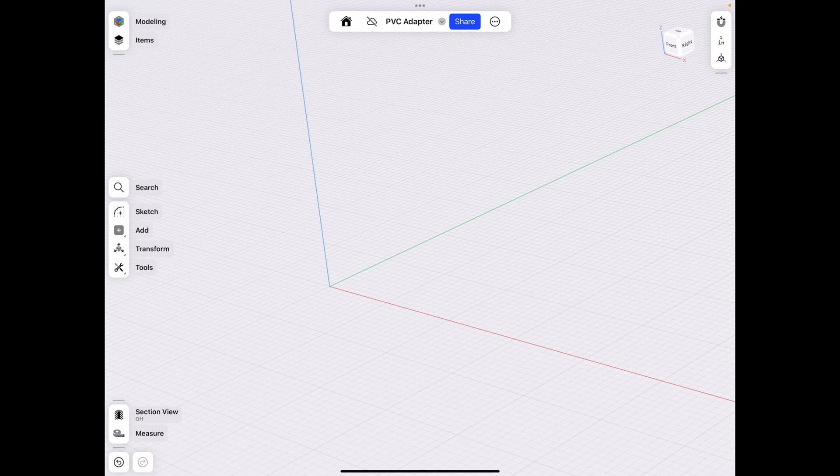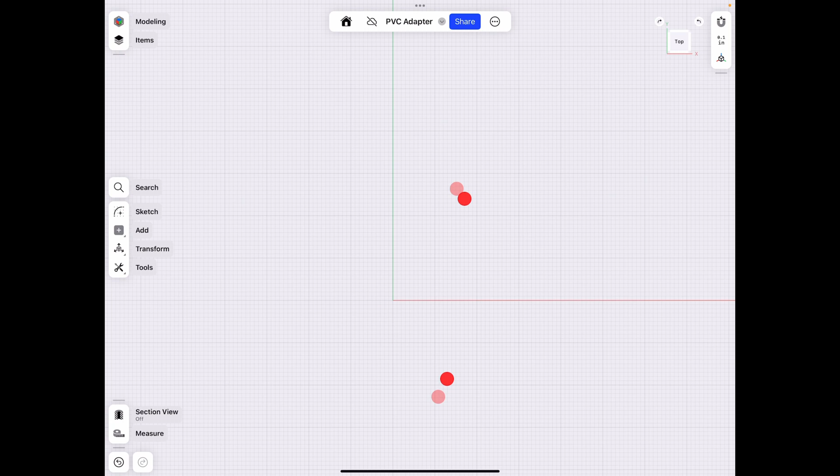Today we're going to be working on a PVC pipe adapter. We'll start off by making a sketch at the top plane. To get to the top plane, make sure you press that top button right there on the right.

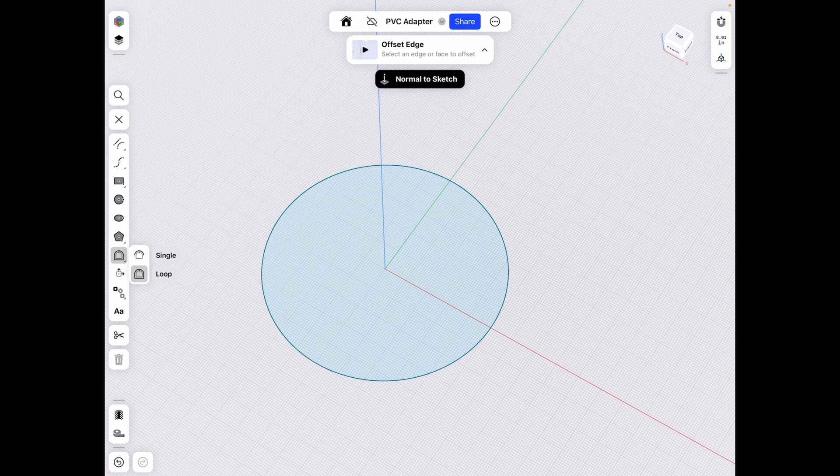We're going to start out by making a circle. Most pipes that you're going to come across are around 1 inch. They're not exactly 1 inch, so keep that in mind as we're working on it, but just for reference on this project, we're going to make it 1 inch to make it easier to count. Instead of extruding it and shelling it, we're just going to offset it as a single, 0.1 inches.

Then we go ahead and select the outer circle and extrude it, let's say 5 inches. Then let's go to the top plane and double click that and make our 2-inch diameter pipe as well.

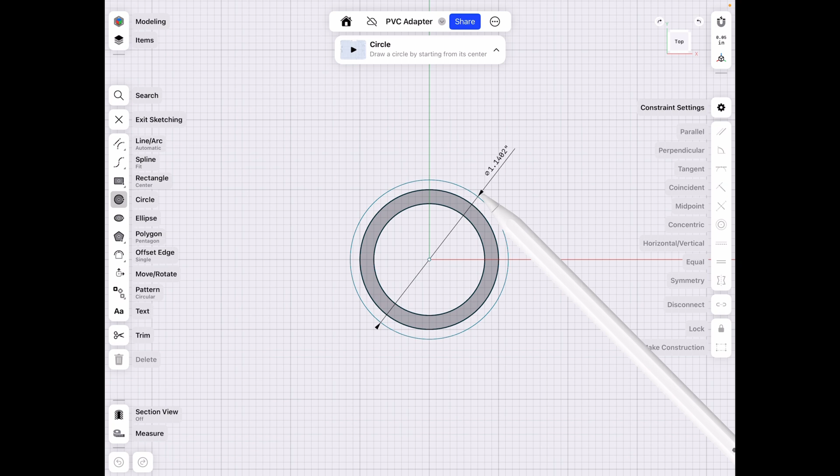Let's go ahead with the circle from the center, make it 2 inches, and then offset that as well, this time by 0.2 inches. And let's extrude that by another 5 inches to have a total of 10.

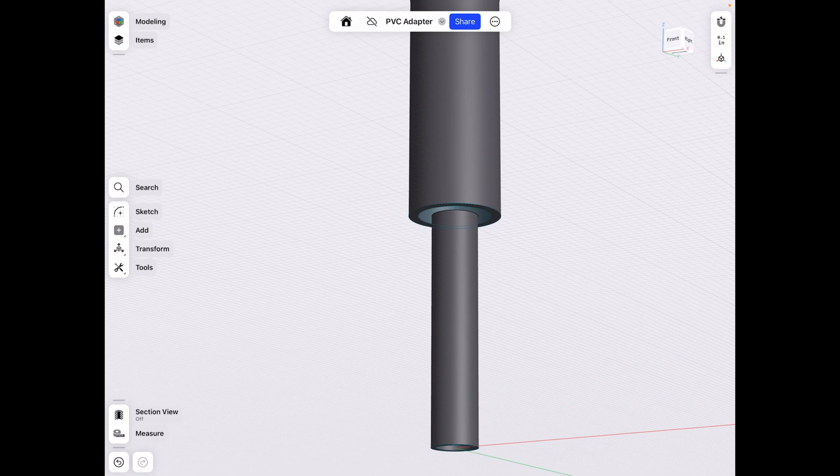Now that we have this, we can see that we need a transition to go from the 2 inch to the 1 inch. So we go to the front plane again, and instead of doing the extrusion way and then making it out of 3D shapes, we're going to actually start off using sketches.

Let's go to section view. Let's zoom in on our object and make a random sketch here so that those dots appear that help us with the sketches. We're going to go ahead and start by sketching outside of the shapes to make a frame of sorts. Let's go ahead and delete that extra one.

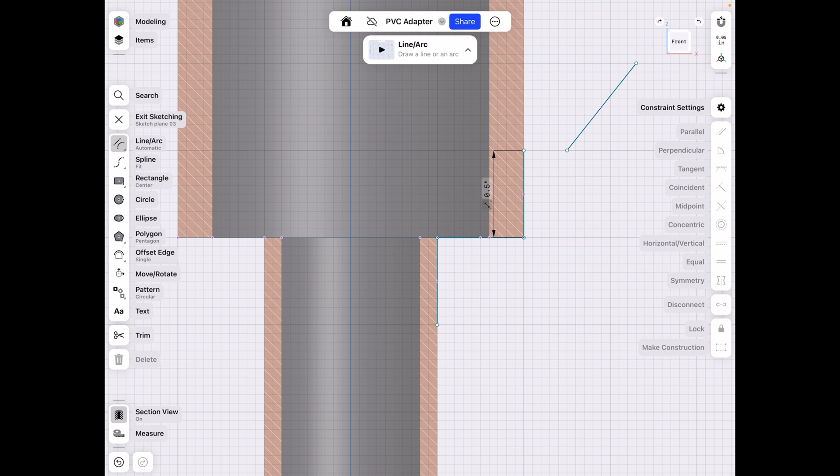It's no longer necessary. We're going to go ahead and sketch this instead of offsetting it, just because we can save some time since we're here on the grid. But if you're off the grid at some point, you can always just offset it to get that exact number.

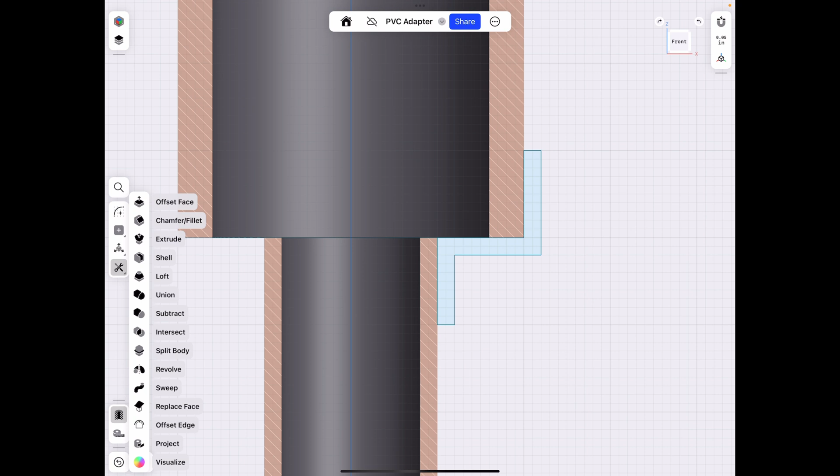So now that we have that, we can exit sketch mode and go to Tools, Revolve. We select our closed sketch, and use the center Z-axis to make a revolution.

If you're off the center, you can always just sketch a line down in the center between your objects, and you can use that line as a revolution. Click Done. Now if we turn off section view, we can see that we have a basic adapter.

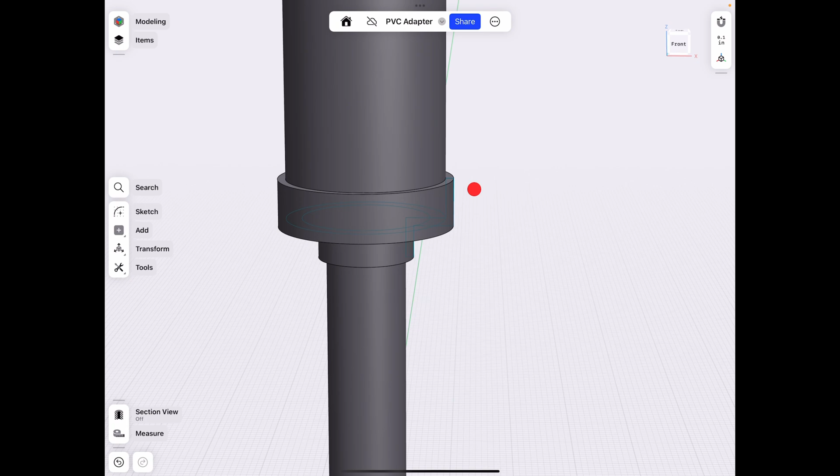Let's go back to the front view and continue on, because as you can see here, while we do have an adapter, we now need a stopper here, because if we just put in our pipe and there's no stopper, it's going to keep going as much as it wants.

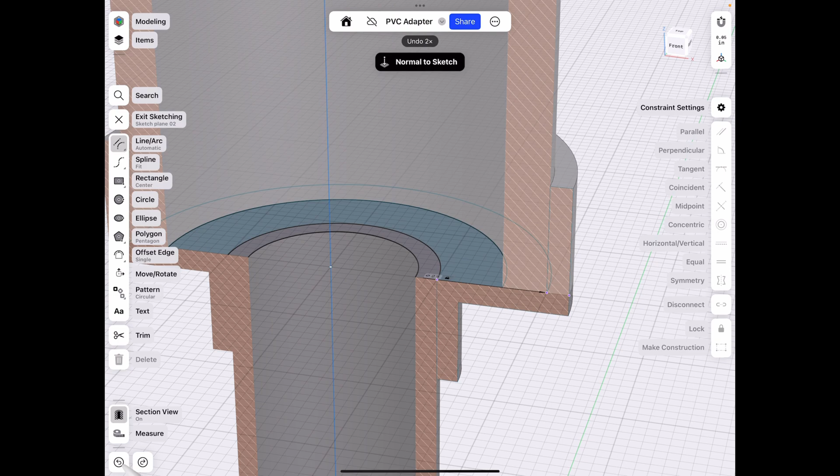So we need to actually extrude that little piece there so that we have a spot that stops the going forward. Let's go ahead and go to Tools and Extrude.

We want to extrude this as a new body, that way it doesn't connect any of the pieces. So make sure you select those two faces, then pull it up, in this case by 0.1 inch, as a new body. Then don't forget to move up your 2-inch pipe by 0.1 as well.

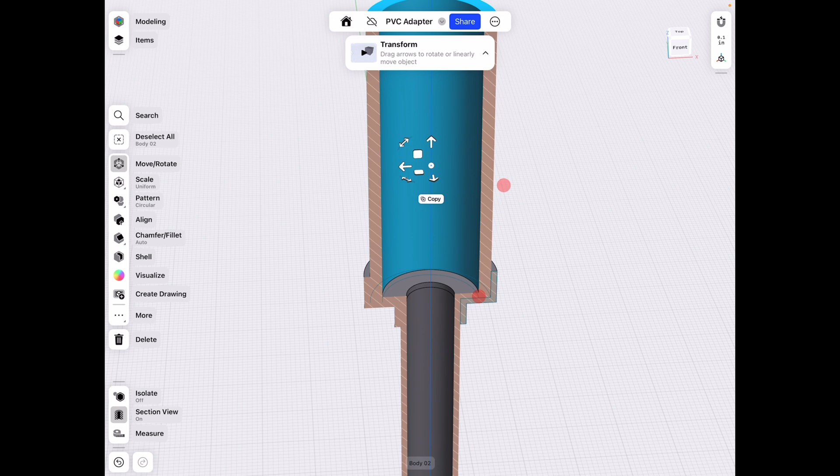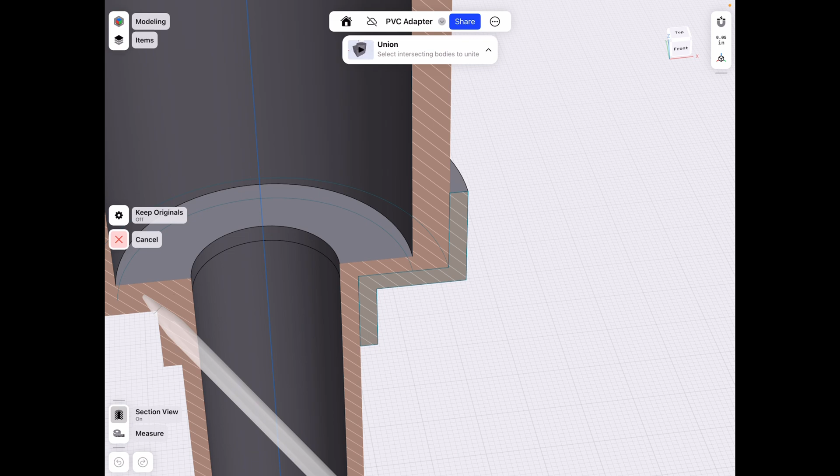Once that's done, we go to Tools. Actually, because I didn't pull this up first, we have to expand it. So let's go Tools, Replace Face, this one with this one, click Done, and then go to Tools and Union. If you would have pulled up the 2-inch first and then did the extrusion, it would have done it the correct way, but let's just continue on and make this, since it works either way.

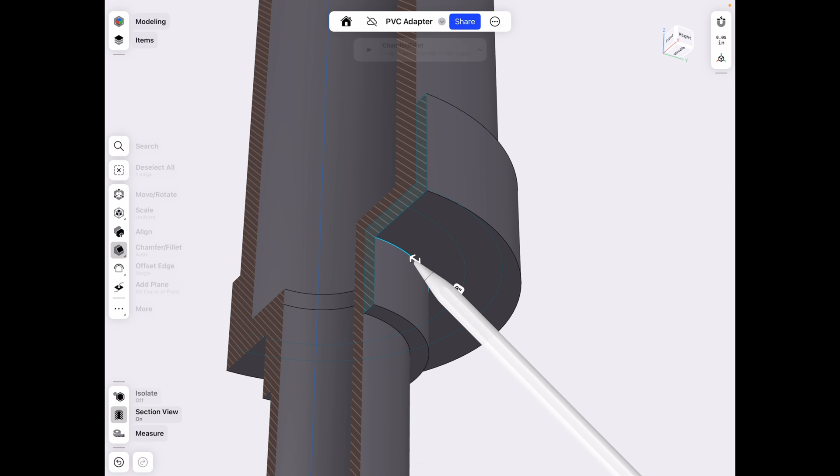And once we have this, we can basically be confident that our pipe transition is pretty accurate, and we can go and finish up making a fillet here. And if you want to find out the exact length of your fillet, you can either click on that line there, which is 0.5, or click on both of these, and you can look down here and it shows you the Z height. Okay, so that's going to be 0.4 Z height. So if you go over here and do a negative 0.4, that's going to be a chamfer of 0.4 inches.

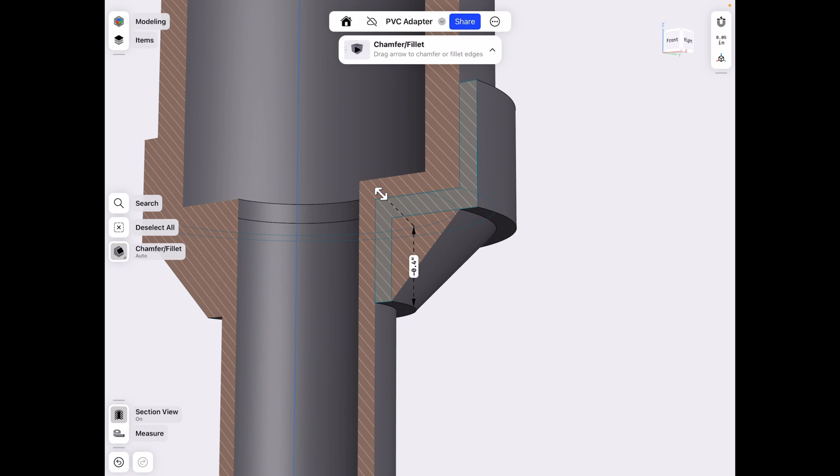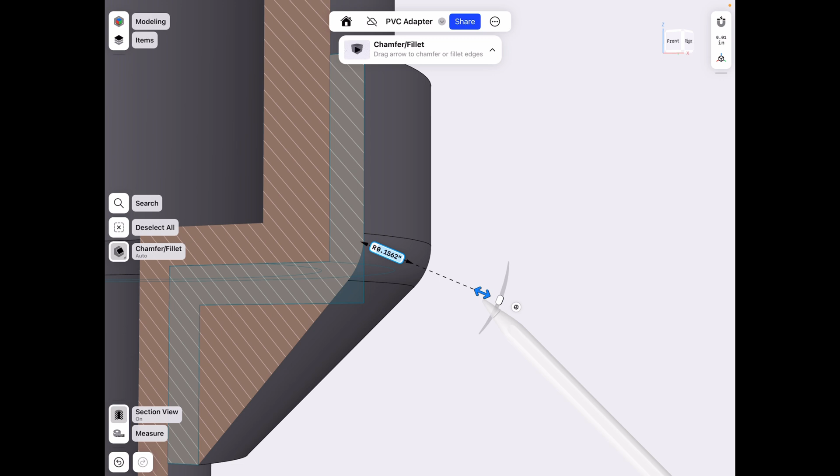And if you want to continue that chamfer, you can just go here. I'm pretty confident that's in 0.1, so let's type in 0.1. And then you're going to have this extra edge here, which if you don't need it, you can always delete it. So that makes our job a little bit easier. All right, and then you can fillet it as necessary. Let's say 0.25 for an example. And we basically have a neat looking adapter that's really 3D printable.

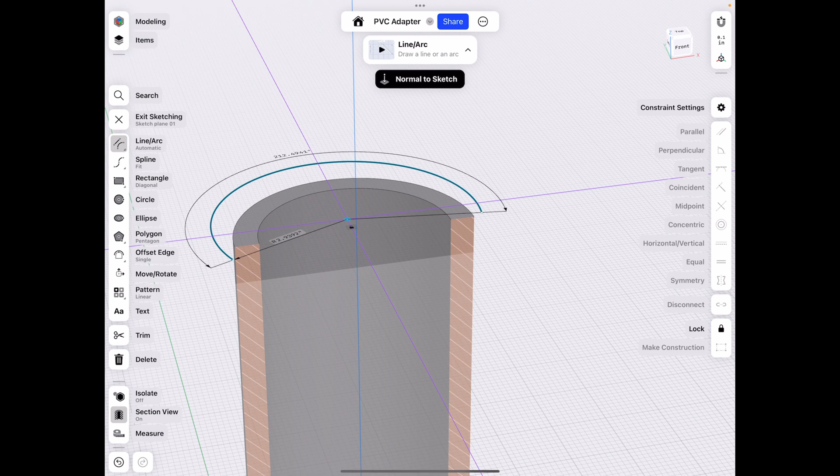But we can go the extra step after this. So once we have the PVC adapter done, we can go ahead and show you guys how to make a cap. So basically the cap goes over the top, obviously, and at the same time while we're working on the cap, we can also show you how to make a plug, so you can decide which one you need for your project. So let's go to the front face again, and sketching is basically the easiest way to get it done, so that's why we're doing it this way.

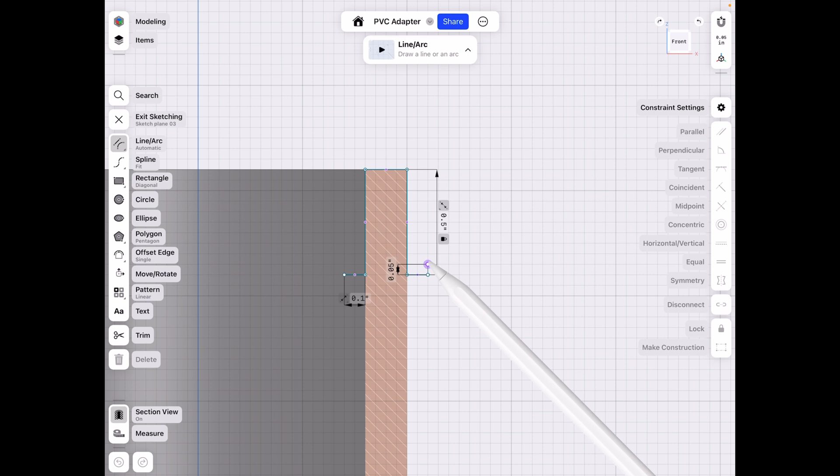But let's go ahead and sketch, and let's make that top up here. Yeah, that's it. And then 0.5 on this side. Let's just go ahead and write that in to make our life easier. And then we could do 0.7 on this side. So basically this side is the cap, this side is the plug. And we can do the next part in two different ways.

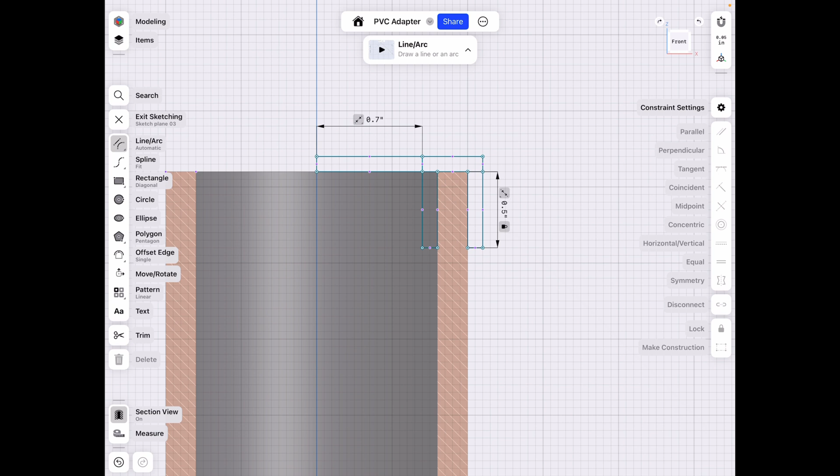So we can either, here I'm making a separate sketch here, we can either revolve these two pieces and then that piece separately and just delete the interface to make this close up, or we can go ahead and simply draw the complete sketch and revolve everything as one piece, depending on how you want to continue that. So tools, revolve, let's select all our pieces in this case, and then use that center Z axis to go ahead and make that revolution.

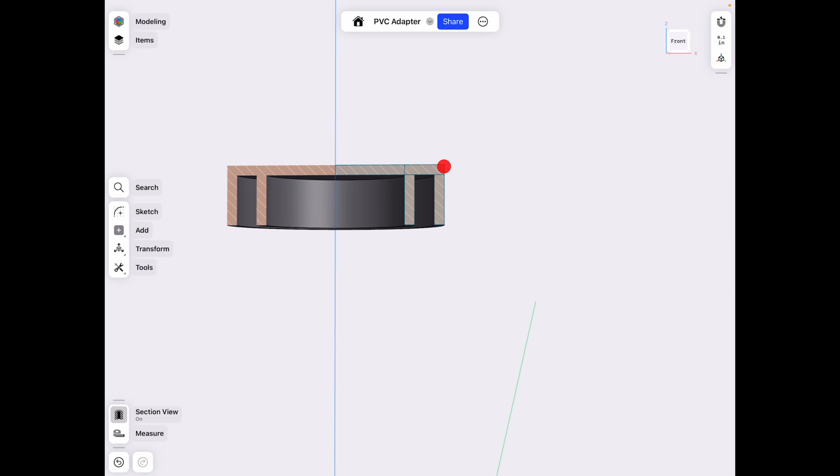As you can see here, if we hide this body in the items menu, we can see we have our cap / plug, depending on how you need it. And also one thing to note, you can actually make the transition smoother, obviously by either filleting these sides, or you can also, for example, if you take this face, you can scale it down so there's a slight angle there as it goes in.

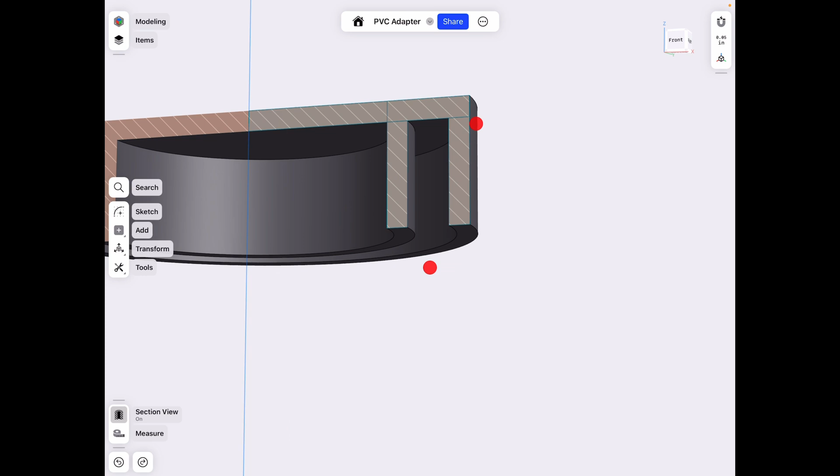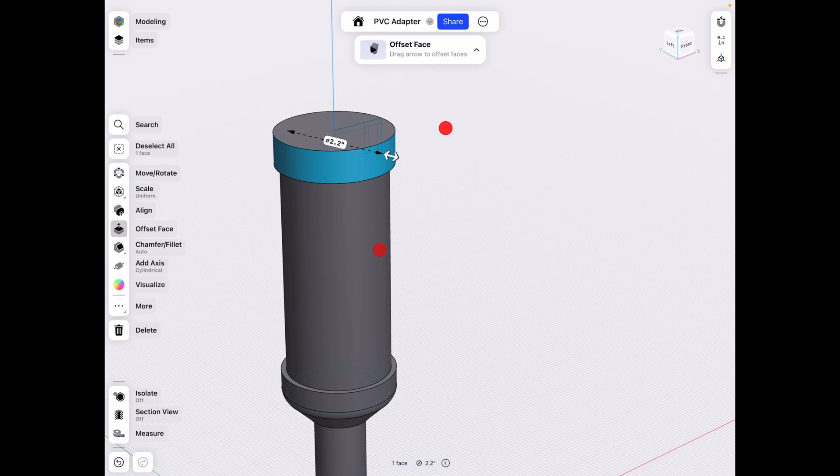That way it's not just a straight fit, because that would obviously be a lot of friction and would use a lot of force. But same thing with this, if you want your cap to slide on easier, you can actually scale it out. So just things to keep in mind as you're working on your project to make your life easier. So we have the PVC adapter, we have the PVC cap, we have the PVC plug on the inside. Hopefully this helps you guys learn how to make these transitions smoothly for your tubing.

So this works also with metal tubing as well, but obviously for welding there are slightly different considerations, because you can't make all these transitions as lightly as you can with 3D printing. So just keep that in mind.